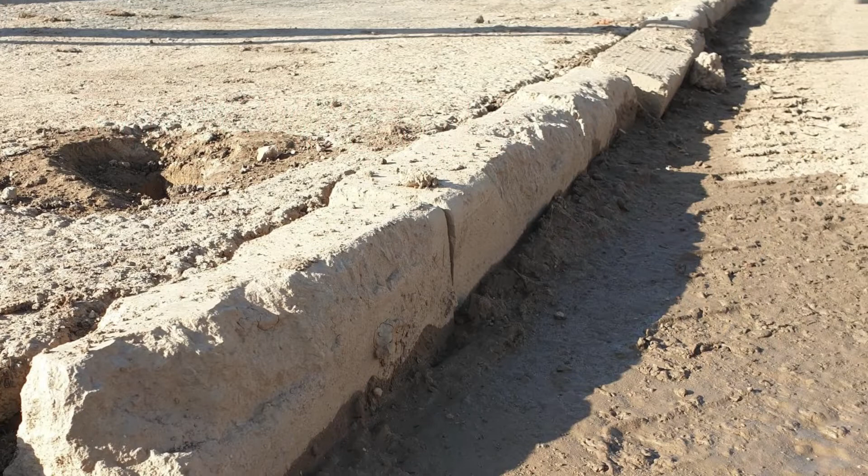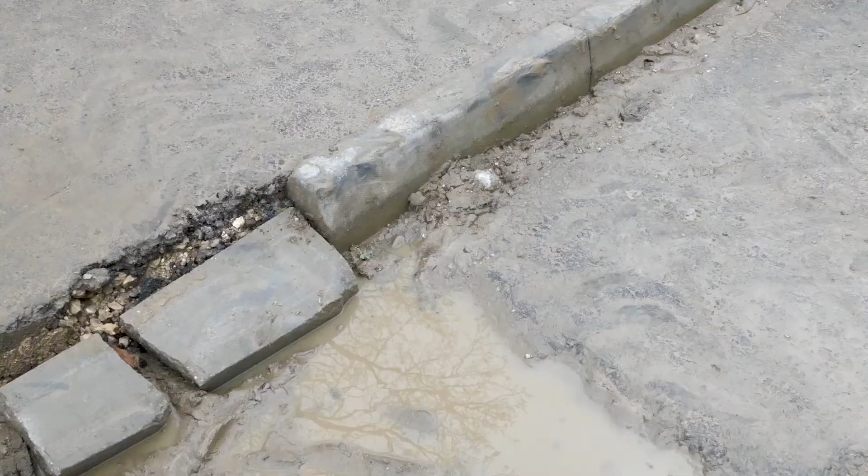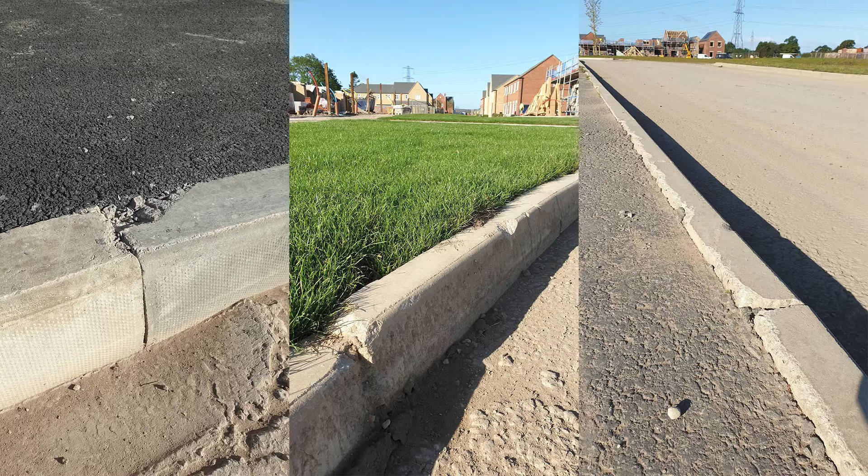Damage to curbs is a serious problem for the majority of house builders. The main cause typically being impacts from vehicles such as telehandlers, diggers and delivery lorries. These impacts can cause structural damage or physically unseat curbs. In certain site hotspots, curbs can be replaced up to 5 times throughout the duration of a development.

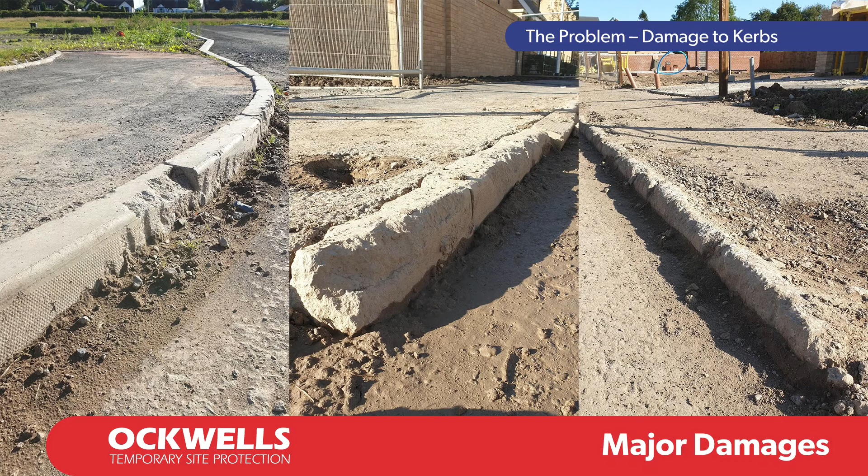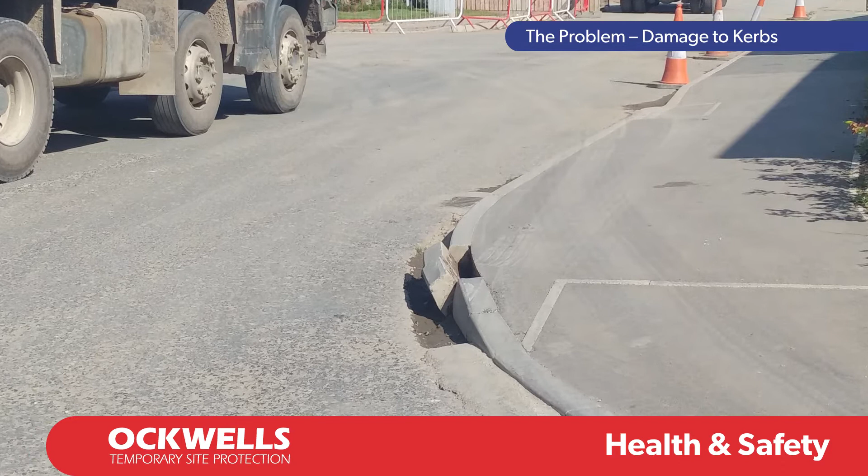Damaged or unseated curbs have a number of implications for the house builder. Minor cosmetic damages, such as chips and small cracks, can develop into bigger problems over time. More severe structural damage can result in the curb disintegrating altogether, also affecting the integrity of the surrounding highway construction. Damaged or unseated curbs can have serious health and safety implications for workers and site visitors, potentially resulting in compensation claims, temporary site closure, and bad publicity.

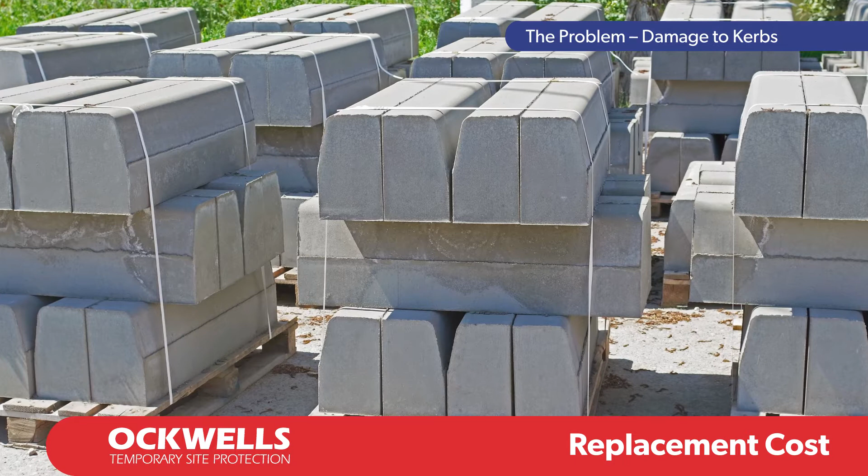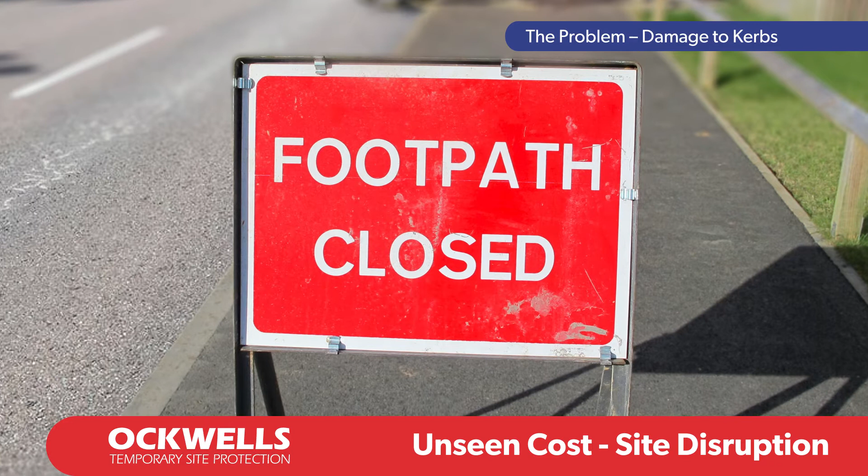Clearly, there are material and labour costs associated with replacing damaged curbs. We'll look at these in more detail in a few moments. But as well as the obvious visible costs, there are also a number of significant unseen costs to consider. Remedial work invariably causes disruption to a site, resulting in delays to schedules, access issues for workers and deliveries, and inconvenience to existing residents and potential buyers visiting the site.

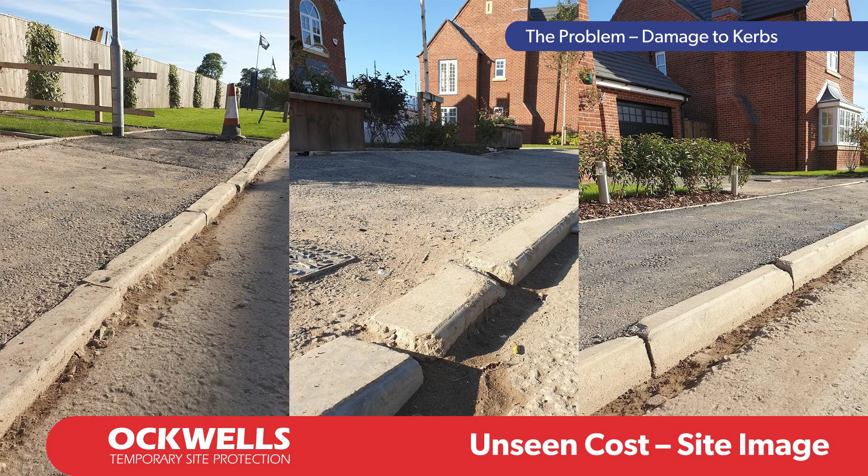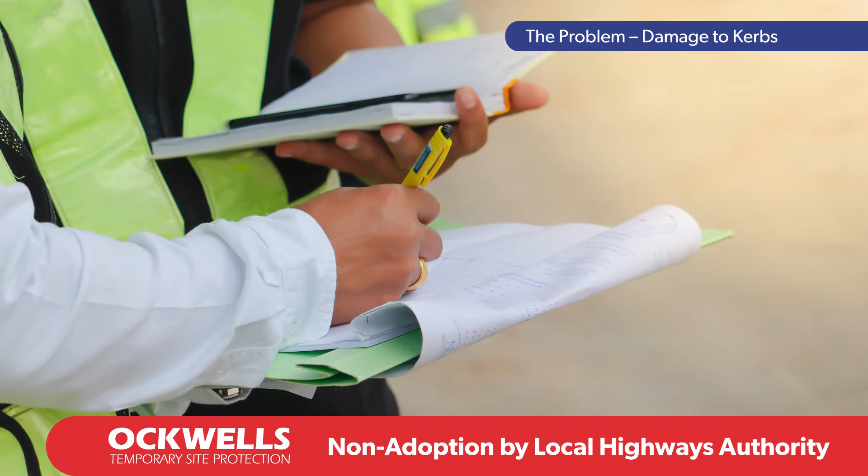Damaged and unseated curbs present a poor first impression of a site, making it appear untidy, unsafe, and less appealing to prospective buyers. Damaged curbs are unlikely to meet the statutory requirements of a local highways authority, resulting in delays to the adoption process. Another key factor to consider is the environmental impact of replacing curbs.

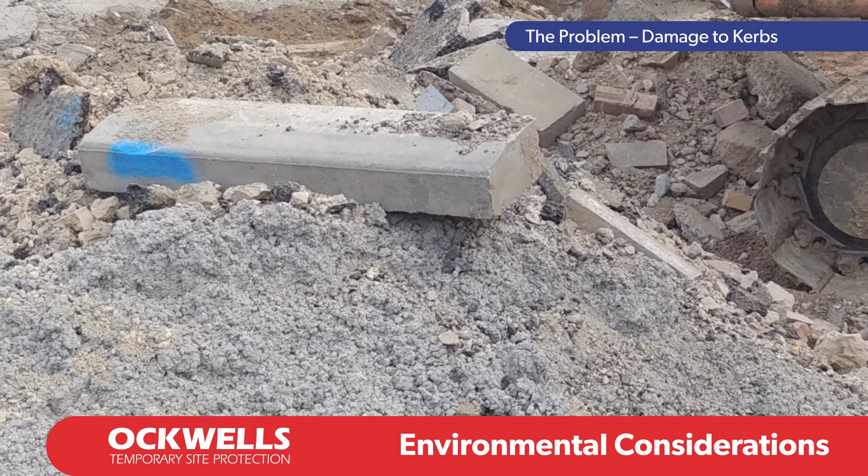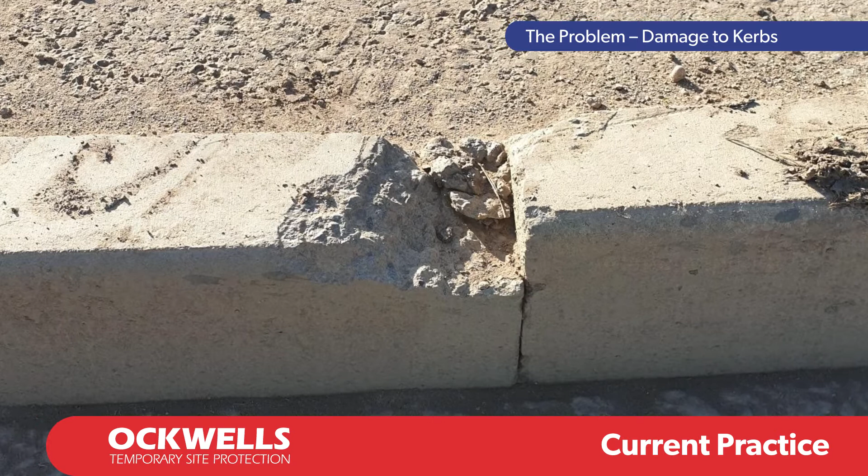It is well documented that the production of the materials used to make concrete has one of the highest environmental impacts of all man-made materials. Currently, the generally accepted practice is to expect damages and that curbs will have to be replaced. There is, however, an alternative to replacement, namely protection.

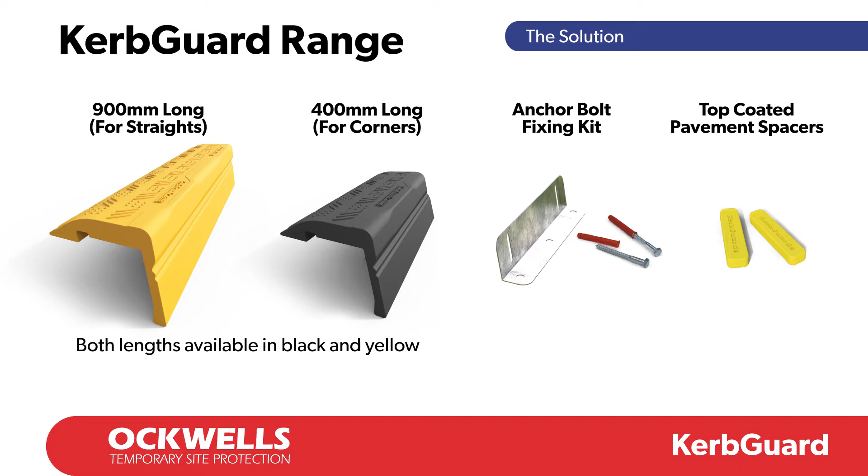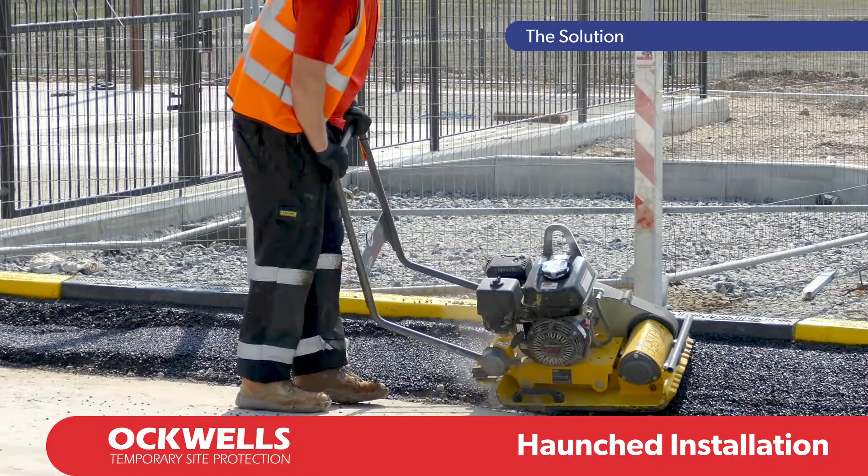The award-winning KerbGuard is specifically designed to absorb impacts, protecting curbs and preventing damages. Made from heavy-duty 100% recycled PVC, KerbGuard is reusable and 100% recyclable. Easily installed, KerbGuard can be fixed in position by simply haunching with temporary tarmac, or alternatively, it can be installed using anchor bolts. Whichever fixing method is used, KerbGuard can be easily removed and reused around the site.

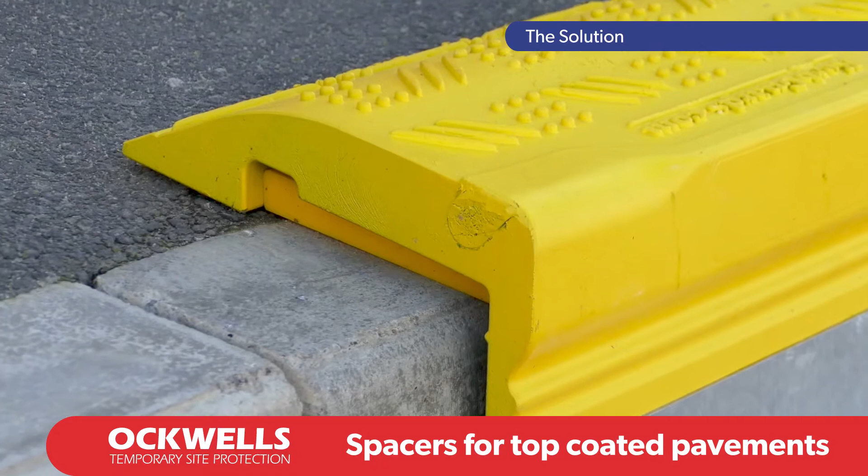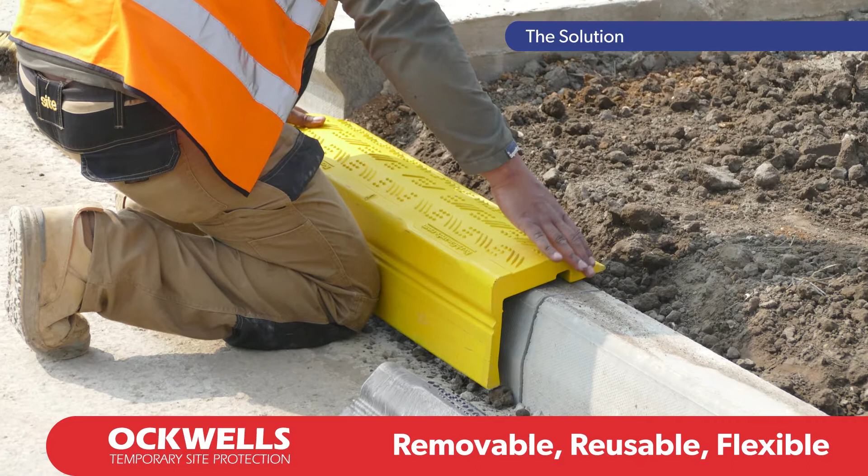Where pavements have been top-coated, a specially designed spacer ensures that the KerbGuard sits correctly in position. The removable and reusable nature of KerbGuard means that it provides a highly flexible solution to protecting the curbs around your site. The next section highlights typical site hotspots where KerbGuards might be deployed and how they can be moved around the site as the development progresses.

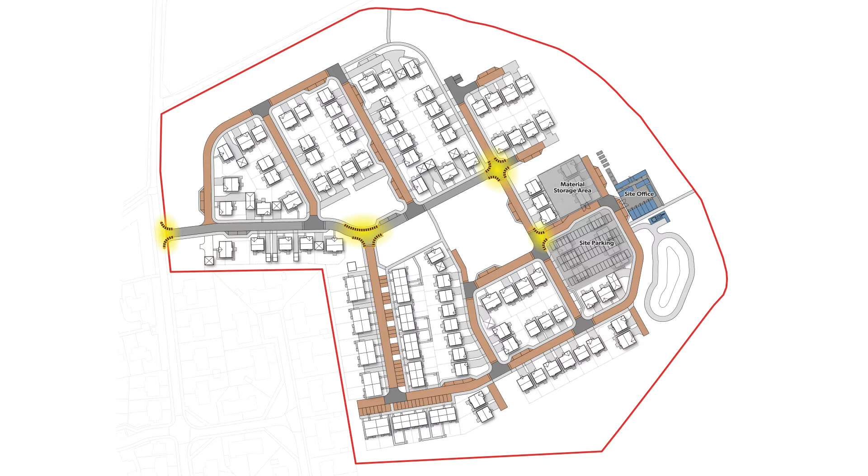The main site roads provide access to key areas and are likely to experience particularly heavy construction traffic. KerbGuards should be deployed at the hotspots along these routes and left in place for the duration of the development. The areas around the site offices, compound and parking areas are also major site hotspots. Again, KerbGuards should be deployed here and left in place for the duration of the development.

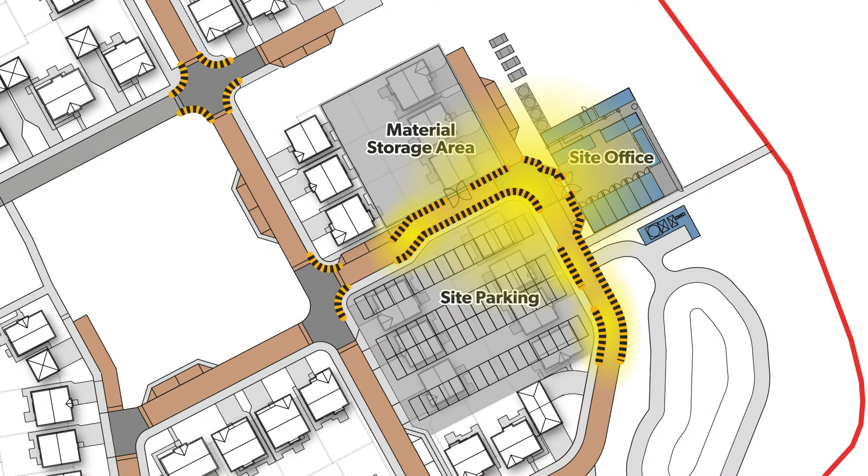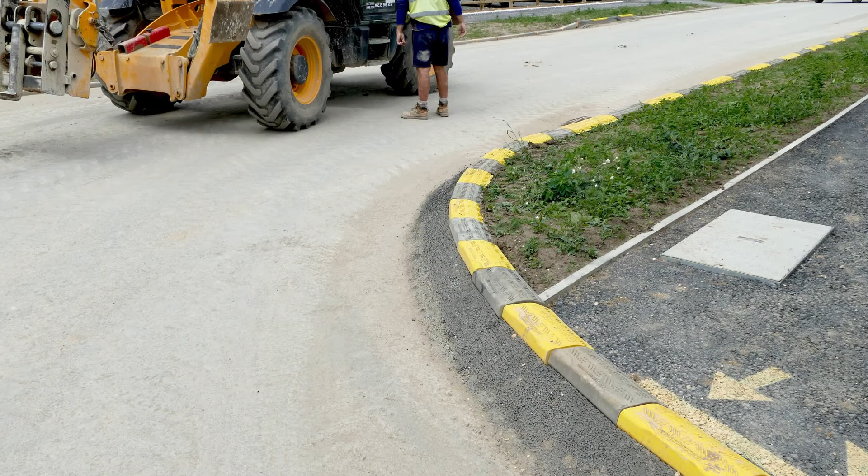Typically, developments are split into a number of phases, with plots in multiple phases being under construction at any one time. Prior to work commencing on a phase, KerbGuards should be deployed in hotspots such as road corners and junctions, remaining in place for the duration of construction in that phase. Taking into account that phases are often split and that multiple sub-phases can be under construction simultaneously, your build execution plan will help determine the number of KerbGuards you require at any one time.

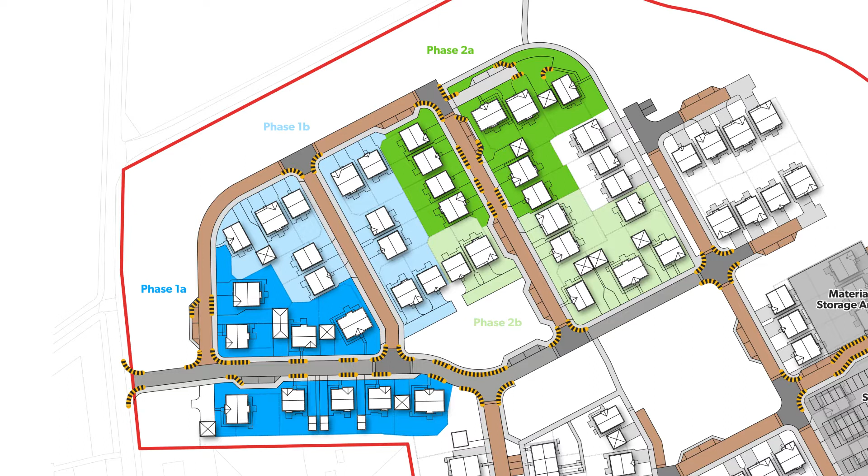Curbs adjacent to plots under construction are another typical site hotspot, being particularly susceptible to damage from telehandlers delivering materials. KerbGuards should be deployed in these locations whilst the plots are under construction. Once a sub-phase is completed, the KerbGuards adjacent to the finished plots can be removed and redeployed to the next sub-phase in the build sequence.

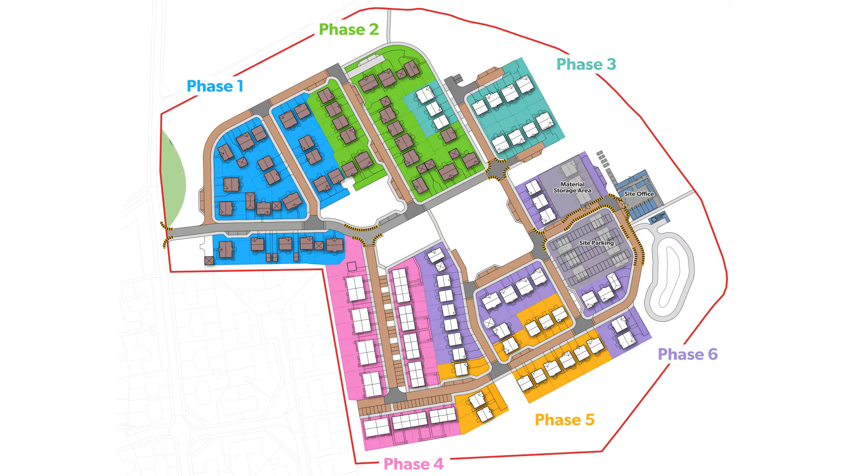Once phases 1 and 2 are completed, all KerbGuards, including those protecting the road corners and junctions, can be removed and redeployed to phases 3 and 4 of the development. These same principles are followed throughout the build sequence, reusing the KerbGuards in multiple locations across the site. Upon completion of the development and with the site offices and compound areas decommissioned, the remaining KerbGuards can be removed and redeployed to the next development.

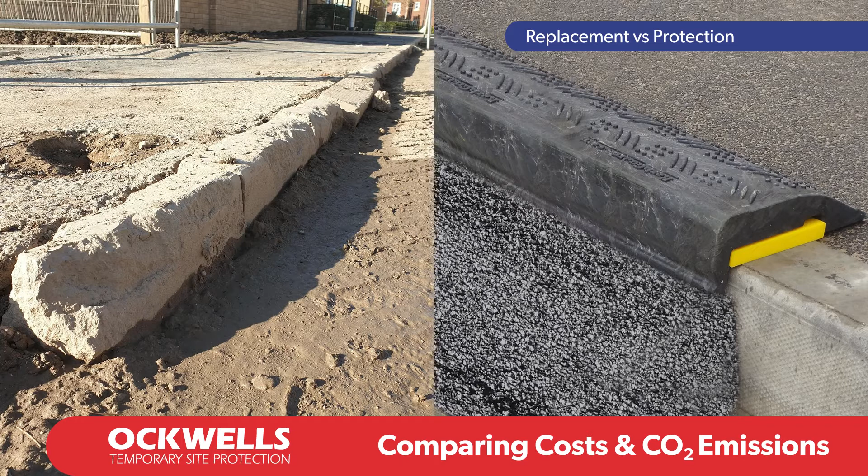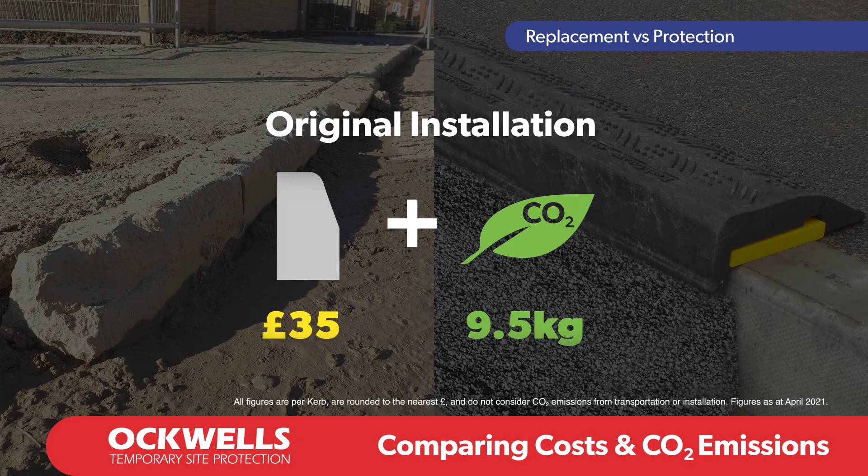So what are the comparative costs and CO2 emissions when comparing curb replacement versus curb protection? Materials and labour for the initial installation of a curb are around £35 per curb, with 9.5 kilograms of CO2 emissions. Replacing a damaged curb typically costs around £43. This figure includes replacement materials, labour and disposal of the damaged curb. In addition to the cost, there is also a further 9.5 kilograms of CO2 emissions.

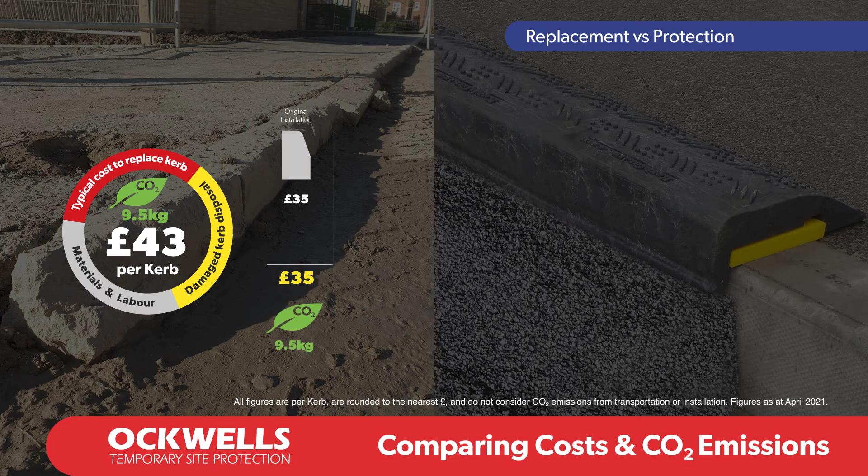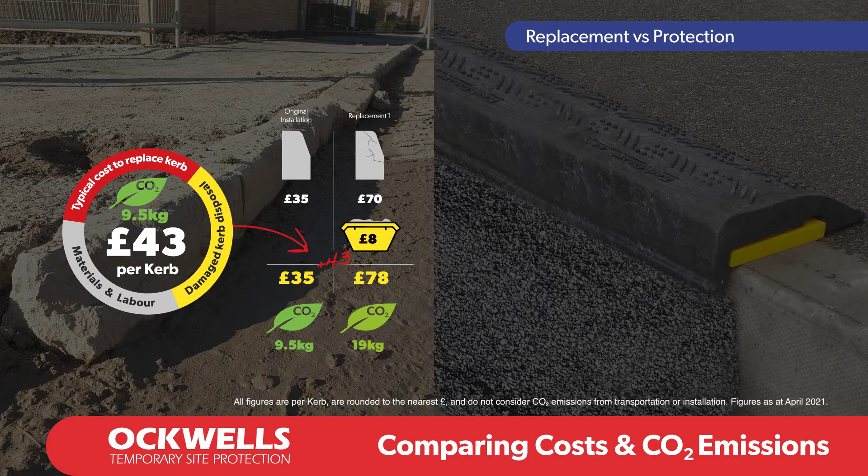So, in addition to the initial installation cost and CO2 emissions, for every subsequent replacement there is an additional cost and CO2 emission to be added. Using the scenario mentioned earlier, whereby a kerb could be replaced up to 5 times, the total cost for replacement could be £250 per kerb, with total CO2 emissions of 57 kilograms.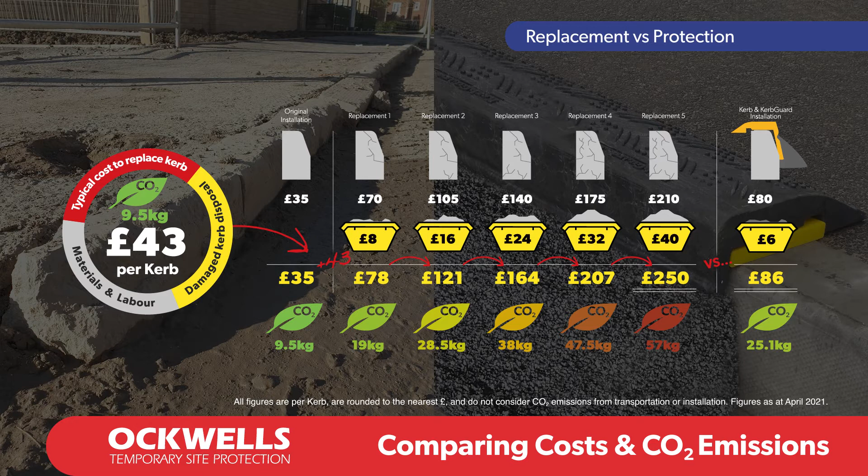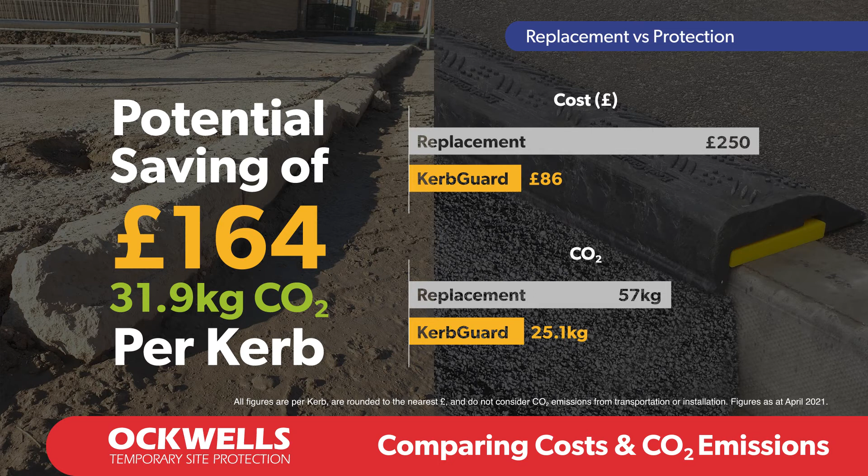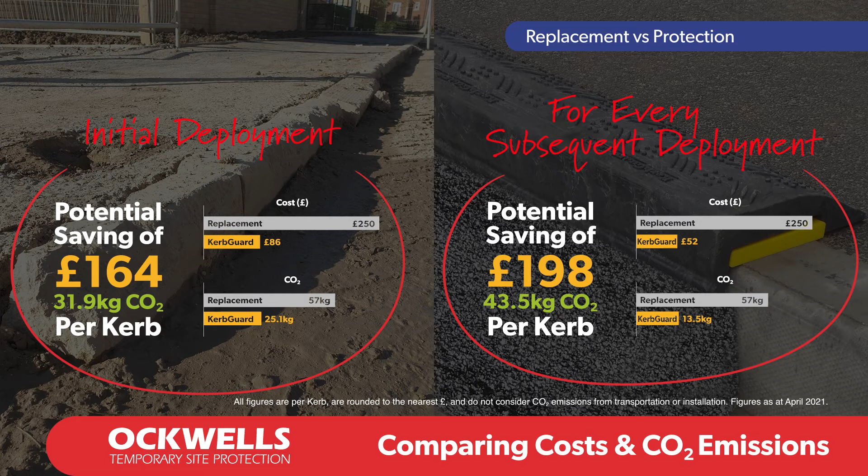If we look at the cost for protecting a curb with KerbGuard, the comparable cost is £86 per curb. This includes the initial installation of the curb and cost of the KerbGuard, the temporary tarmac and labour for the installation and removal of the KerbGuard, and the disposal of the temporary tarmac. The comparable CO2 emissions come in at 25.1 kilograms per curb. Overall, a potential cost saving of £164 and almost 32 kilograms of CO2 per curb. Not forgetting that the KerbGuard can be reused multiple times, generating further potential savings of £198 and 43.5 kilograms of CO2 per curb on each subsequent deployment.

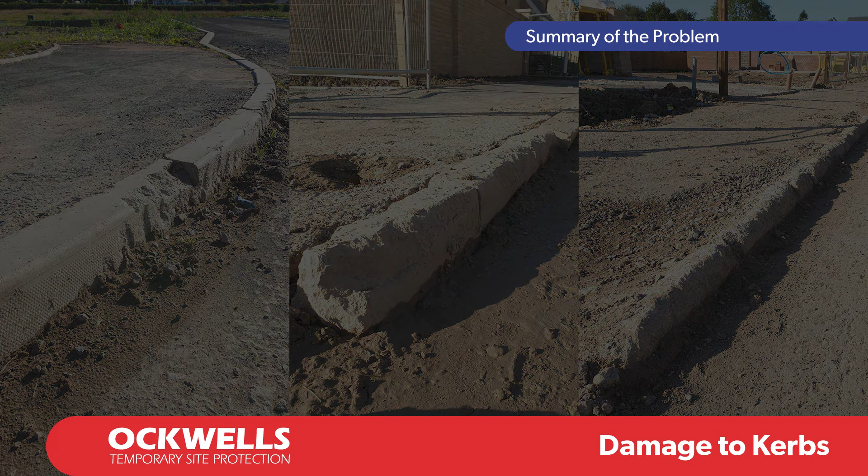To summarise, damaged or unseated curbs cause significant issues for the house builder. These include cosmetic damage, structural damage, cost considerations, health and safety concerns, as well as the unseen costs such as site disruption, site image, non-adoption by local highways authority, and the environmental impact. All of these have a real and significant influence on non-productive costs, therefore presenting a compelling argument for the protection of curbs.

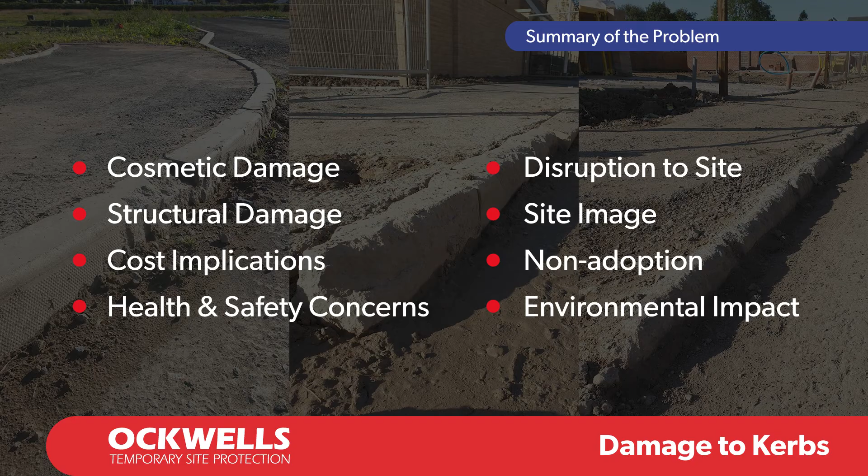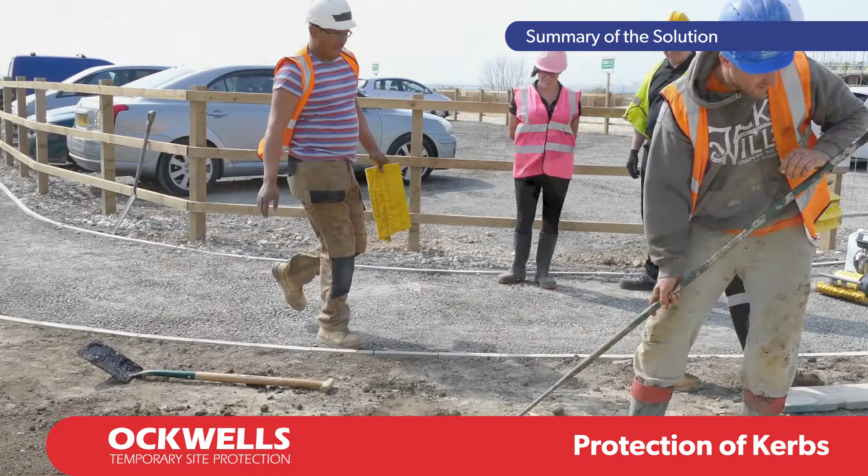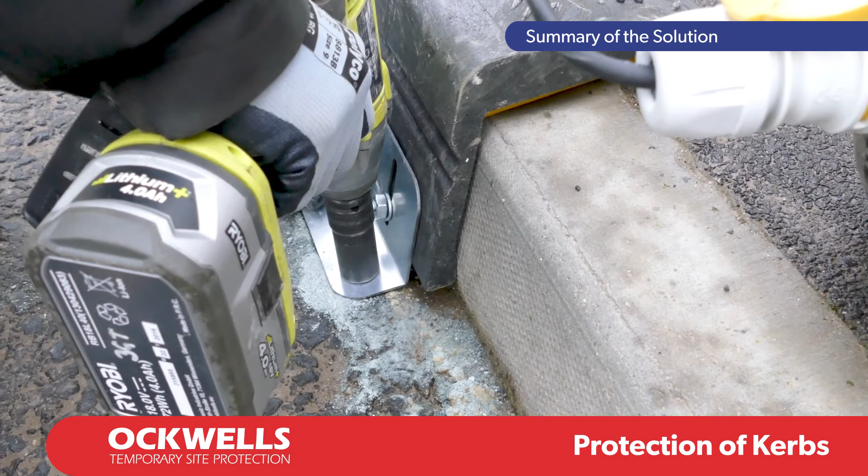KerbGuards protect kerbs from impacts, reducing the likelihood of damages and the need for replacement, resulting in substantial cost savings. KerbGuards help to alleviate health and safety issues, making your site a safer environment for workers and visitors. Made from 100% recycled material, KerbGuards are reusable and 100% recyclable, providing significant environmental benefits. Furthermore, KerbGuards also reduce the unseen costs associated with curb damage and can improve your site's image, helping towards accreditations such as the NHBC Pride in the Job Awards.

Don't replace curbs, protect them with KerbGuards.